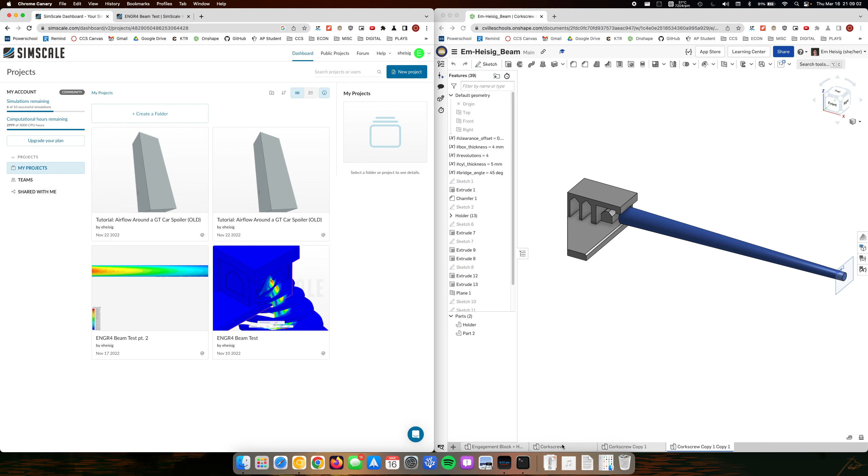So right up here, we're talking about the FEA project. For whoever's grading this, I was sick around that time, so I missed about half of that project, and this is a little out of order. But at the end of the day, I did still complete it and understood the basics of it. Funnily enough, a bit after we did this project, Onshape has now implemented their own FEA, so hopefully we never have to use SimScale again. It wasn't that bad to deal with, but built-in FEA is a lot better than having to go to a whole other application.

So anyway, getting to the meat of it, if we look at Onshape, we are seeing this pretzel, I'll call it. If you can't tell, there are some changes - if you can't tell, I really was sick around this time. So this is kind of my idea. My idea was a helix.

One, it looks really cool, it's funny. But also, I just learned how to do helixes from the spinner and prop assignment, which we had just done before, so I thought this is really funny. But also, I thought maybe it has some structural integrity because there's a pattern that can hopefully spread out the stress without using too much mass.

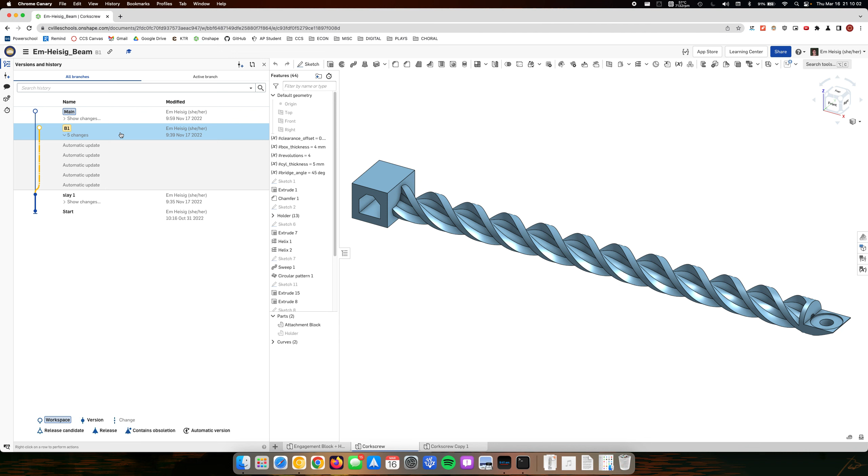And then, as you can tell, I continued to make changes - I believe this one just had some reference changes - but this one is what I ended up changing it to, smoothing it out a little bit more because printing that, the overhangs would just not work. But let's go back to Slay 1 - I know, poor naming choice. But if we go back to it, loading...

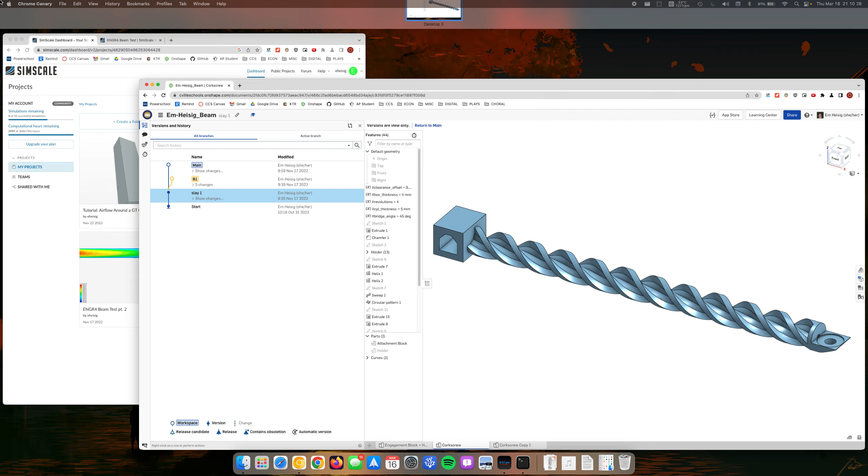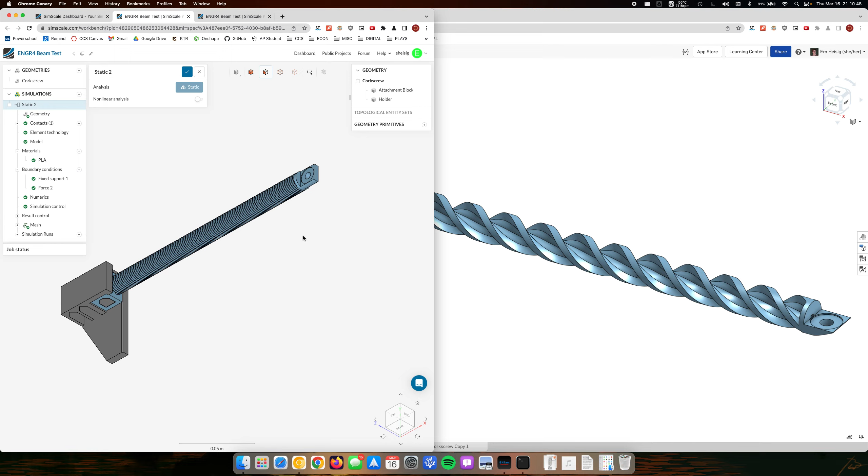We see that, and so we're going to now look at the analysis of how it works. So this is yet another version - there are a couple geometries that I made, a couple different versions. This one is different, and optimally I would hope to have this version in here, but as long as you understand the basic idea of why a helix like this doesn't work, I can show you.

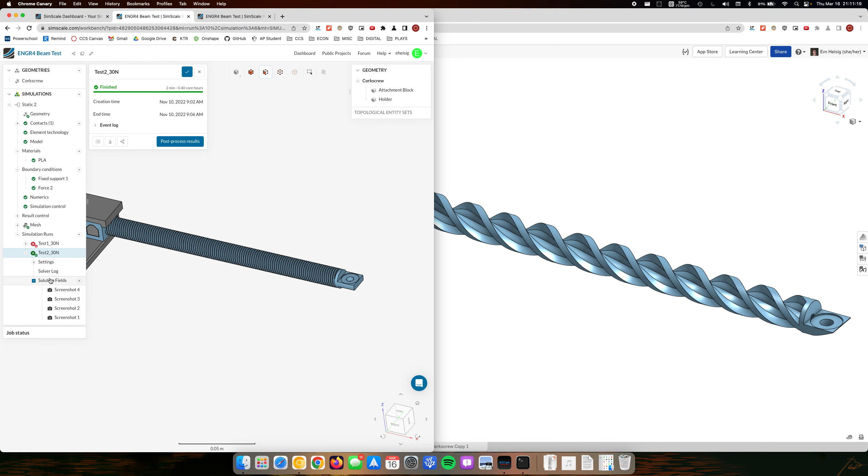So this was a static analysis we went through, and then the simulation run - that one failed. As you can see, this is a very weird geometry, so sometimes the FEA just kind of glitches out. We're looking at this solution field... it's going to load. Rural internet does that to you.

Yeah, so this was a really bad idea, I'll completely admit. This is not normal, that's what I'll tell you - this is not normal. That is 4,000 millimeters, that is 4 meters of displacement. If this thing did not break, it would be bending 4 meters. But it would break - this is not a realistic thing.

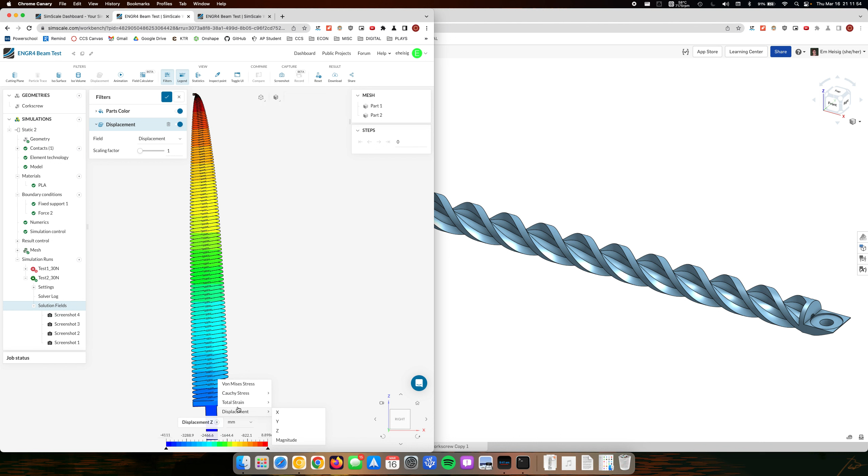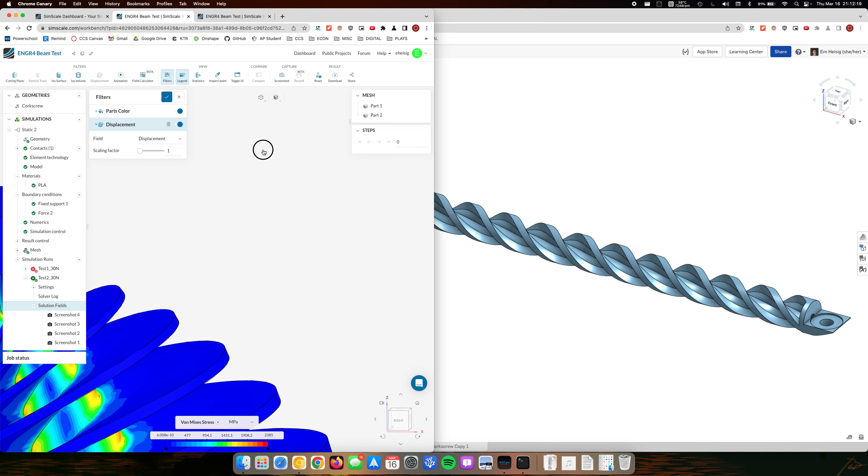So we're going to go to von Mises stress in megapascals - that's just ridiculous. So down here, this giant bend, there's not a lot of stress on it, right? Especially on the outer edges. And that's the problem with this design, is that despite what you may think, what I thought, there's no stress that actually gets sent to the outside here.

It's all just put on the middle. And if you can kind of see, there's these red spots right here. So this is what's going under like 2,000 megapascals, or 2 gigapascals of stress, which is absolutely ridiculous. Yeah, it's just completely ridiculous.

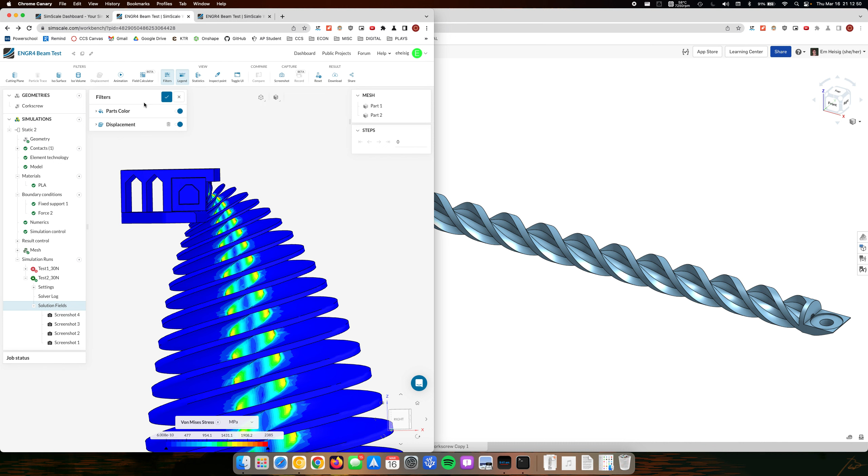And so we went back to the drawing board, and I ended up coming out with this - a way simpler thing. We'll leave this... oh, pardon me, this is the wrong Part Studio.

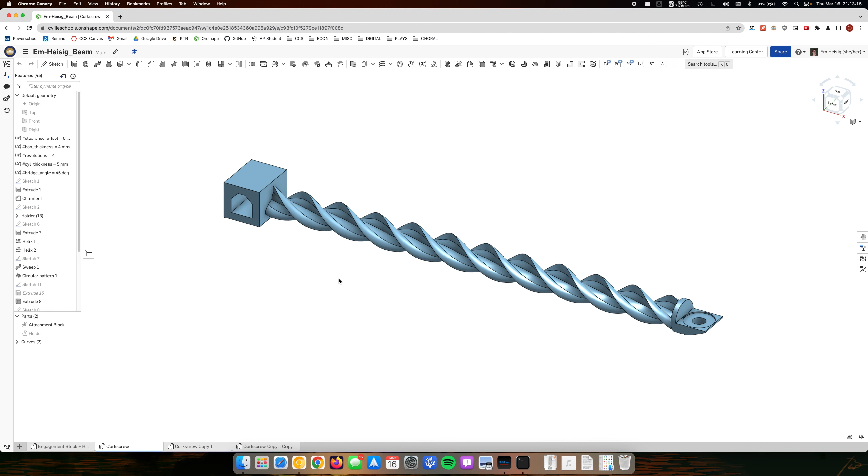Versions are finicky. Onshape's versions implementation, I've complained about them before. They're all right. You really have to learn to use them differently than most other versioning things. So it's not my favorite.

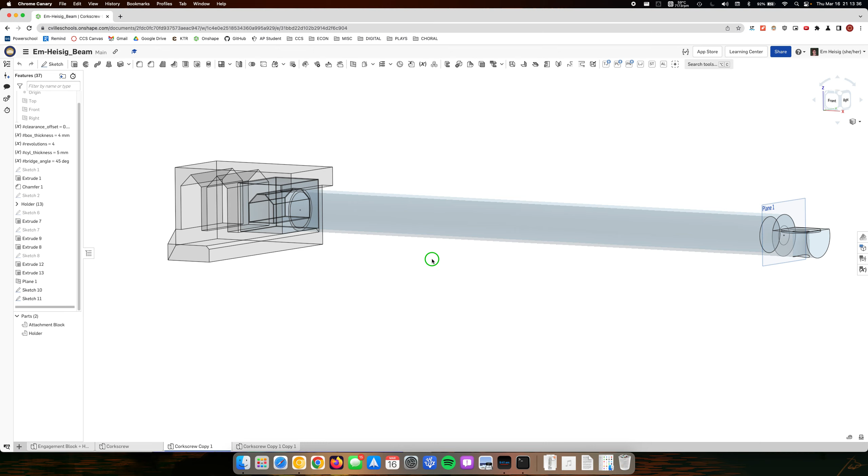This is a hollow cylinder. I said, oh wow, I way over-engineered the previous one, and so I'm going to under-engineer this one. That is literally it, I don't know really what to explain. I just thought, you're not using a bunch of volume in the middle, but you do have this really big radius where there's no big fins taking up mass, it's just kind of hopefully stretching it out. Hopefully in the circle it evenly distributes enough that it's going to be able to take a lot of pressure.

Without bending too far. And when it gets too much pressure, it is going to break. It's not going to bend, but it is going to break. But hopefully it can take a lot before it does that.

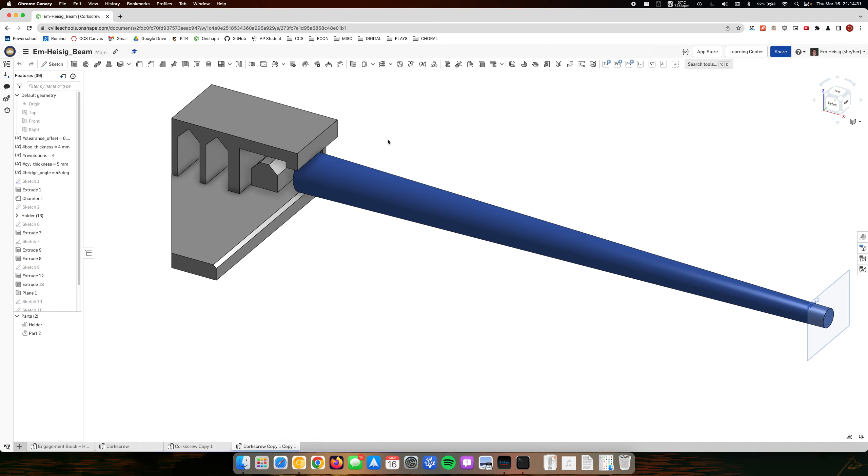And then this was a random weird idea where I was still getting over the over-engineering idea, where I was trying to make it skinnier as it went on to hopefully put more reinforcement at the base. I think there's merit in the idea, but it's a very complicated idea. So we're going to go back to this. This is kind of what went on the final drawing board, and this is what also ended up getting printed.

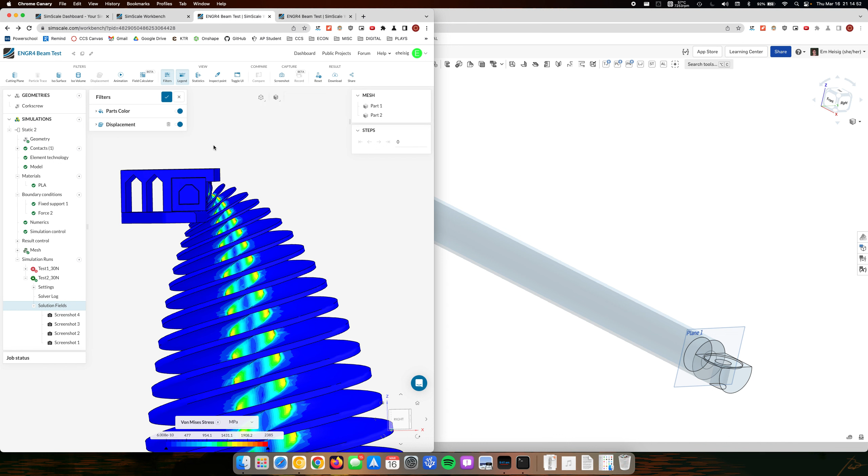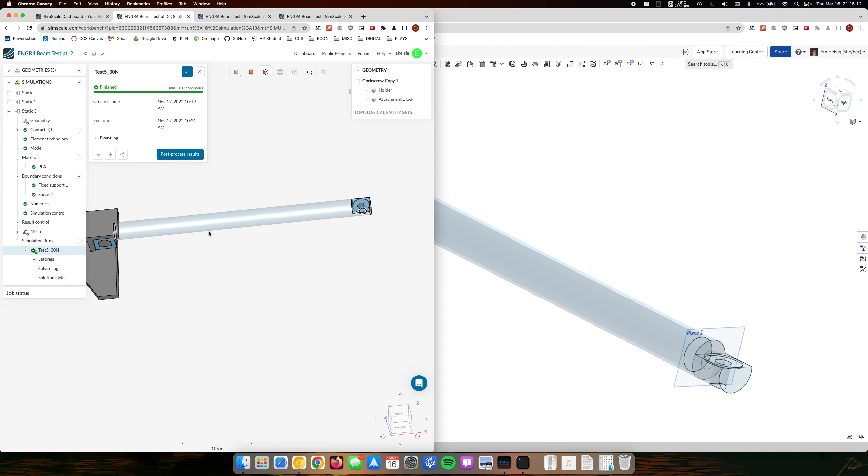And if we go back to SimScale, we go to ENGR4 Beam Test pt. 2. Making this work basically broke the SimScale configuration so much that I basically just made a new one. As you can see, I just did another static analysis simulation run. All this took was one run, and you could use more runs just to get more data points. Granted, this is kind of the most practical theoretical can get, and also the most theoretical practical can be. Kind of weird in the middle.

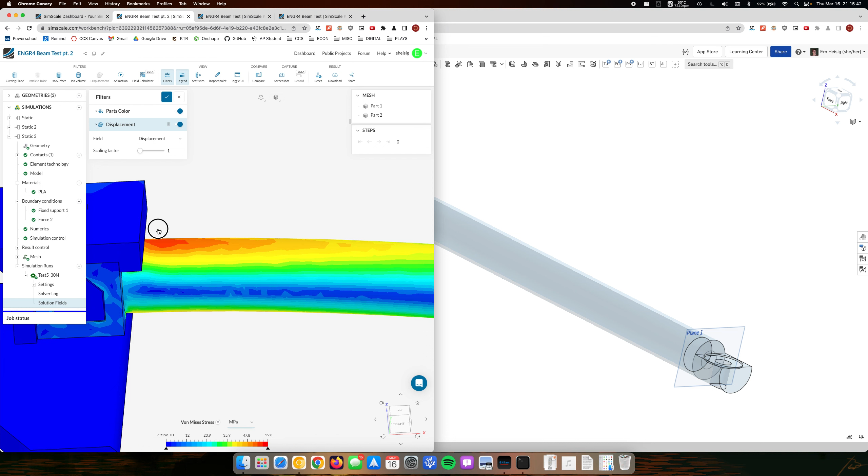So this has also, when we get out pascals, we don't need to be in pascals anymore. This only experiences about 60 megapascals of stress, so way less. And as you see, there's still this problem where near the base you're getting a lot more stress, which makes perfect sense. So I think if I had more time, I would maybe try that tapering idea, because as you see, a lot of this mass right here is not undergoing the most. So if you taper that off.

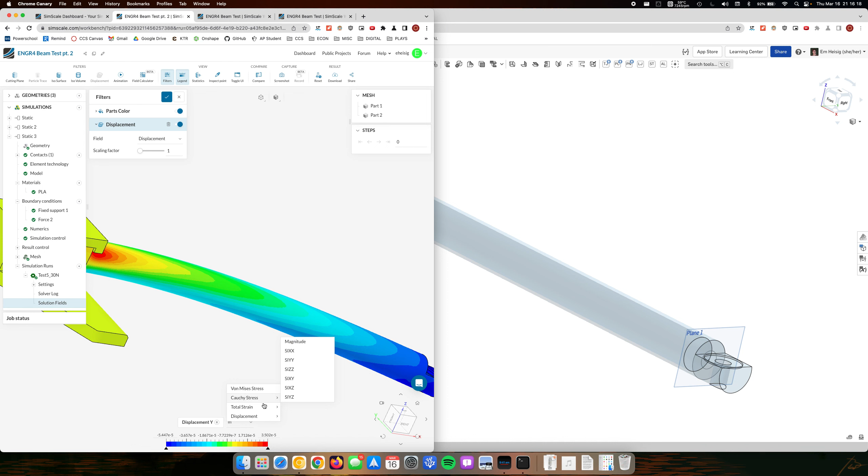Especially in the middle right here, and you make that a little thicker, you can more evenly distribute it. And then if we're also looking at our displacement, let's go to - pardon me, that is Y, not Z displacement. We need to look at Z displacement, and we're looking at that in millimeters. We can see that this only dips down around -30. This is all well within the constraints. Frankly, I'm surprised at how the pretzel idea got to this idea and how vastly different they worked. This one worked very well.

And I say my biggest reflection on that is that for some people it's really easy to over-engineer, and for some people it's really easy to just under-think something. And so if you find yourself leaning too far one way, just simplify it to what you need to, the problem you need to solve, and just take the steps from there. Do the bare minimum you think will solve that problem. And so, for me personally, I have trouble with, I tend to over-engineer sometimes. And so for me, I say make it simpler. But for other people, it doesn't make it more complicated, but make it more resilient. And for them, it's going beyond their bare minimum, because obviously their bare minimum is likely not working.